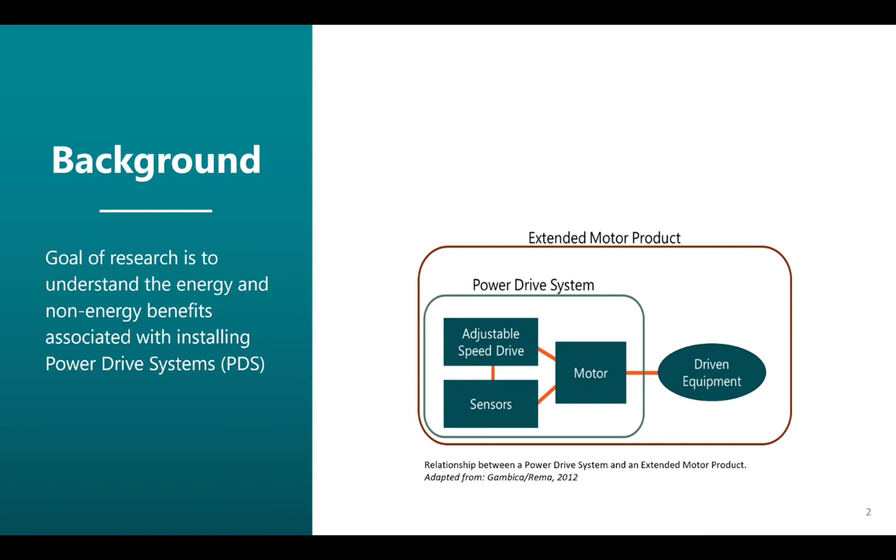While the use of adjustable speed drives and appropriate sensors and controls, or power drive systems, offers significant energy savings potential in commercial and industrial applications, they have traditionally been installed in variable load applications, such as heating and cooling systems responding to variable climate conditions. Many believe they only save energy or are cost effective in these types of applications. The goal of this research was to better understand the energy and non-energy benefits associated with power drive systems in both constant and variable load applications, and particularly understand if power drive systems were cost-effective in constant load applications.

Now I'm going to hand it over to my colleague Nate to talk about the specifics of the analysis.

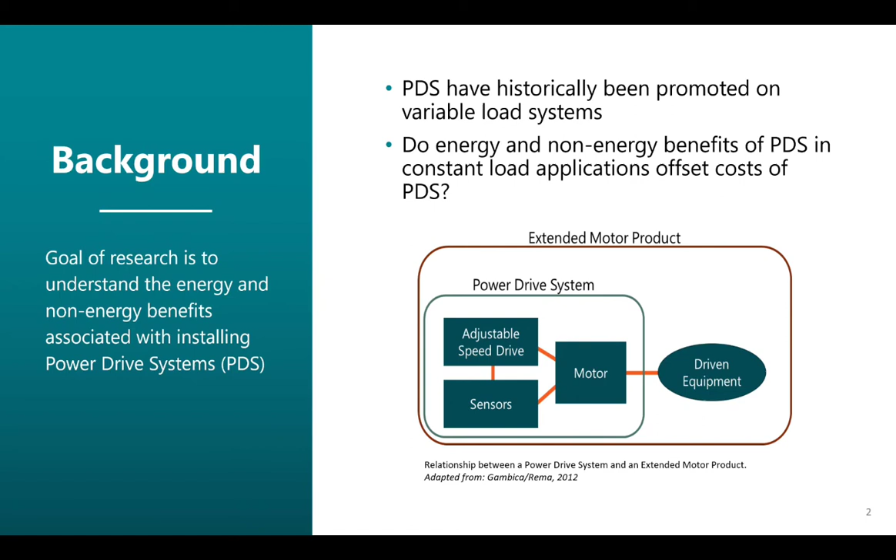While the universe of motor-driven loads is vast, we had to start somewhere. So to perform our analysis, we started with recent data collected by NEEA on pump performance in the Pacific Northwest. We used data on 132 pumps from that work, incorporating pumps that had sufficient characteristic and operational information to effectively characterize load profile and energy consumption in both constant and variable speed applications.

Using these data, we explored three main topics. One, the specific load profiles observed in different applications and how variable or invariable they were, to determine if there were any inherently constant or inherently variable load applications. Two, the energy savings associated with power drive systems across these applications and load profiles. Three, the observed application or penetration of power drive systems among these different applications.

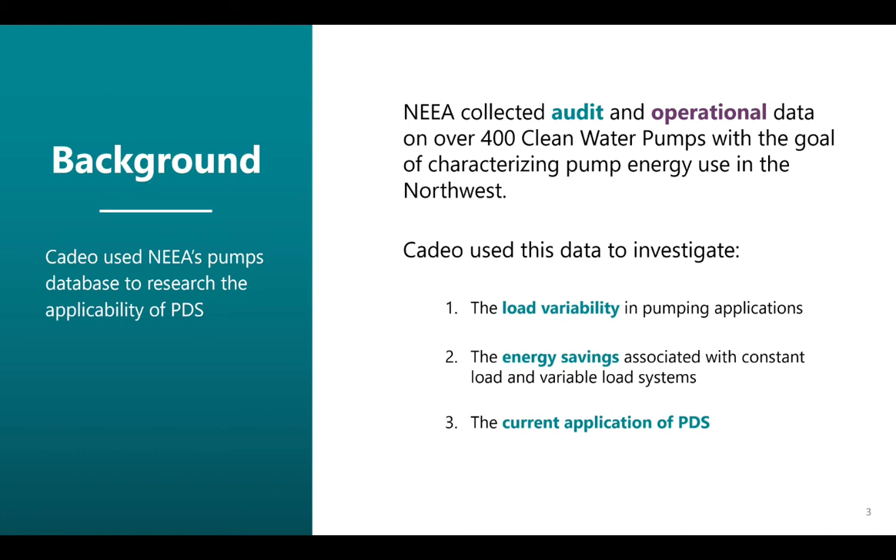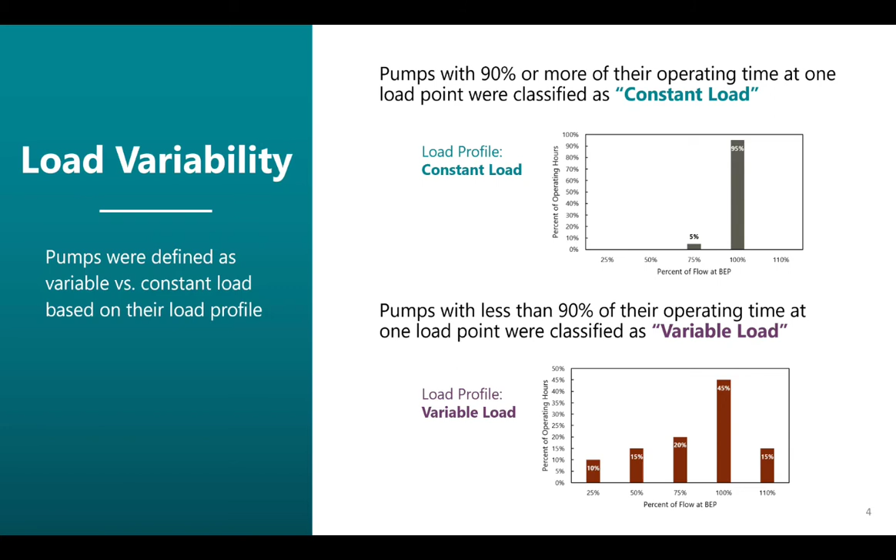While these data only include pumps, the general findings can be expanded to other similar motor-driven products like fans and compressors. To perform this analysis, we first investigated the load profiles observed in the data and categorized them into constant load and variable load systems, where constant load systems spent 90% or more of their time at one load point, and variable load systems demonstrated more variable operation. Note that these characterizations are purely related to the load the pump is serving and are independent of whether the system is equipped with a variable speed drive or not.

The first thing we observed was that there were no applications that were inherently constant load and demonstrated no variability. Some applications are more variable than others, but there are opportunities for savings from power drive systems in all applications.

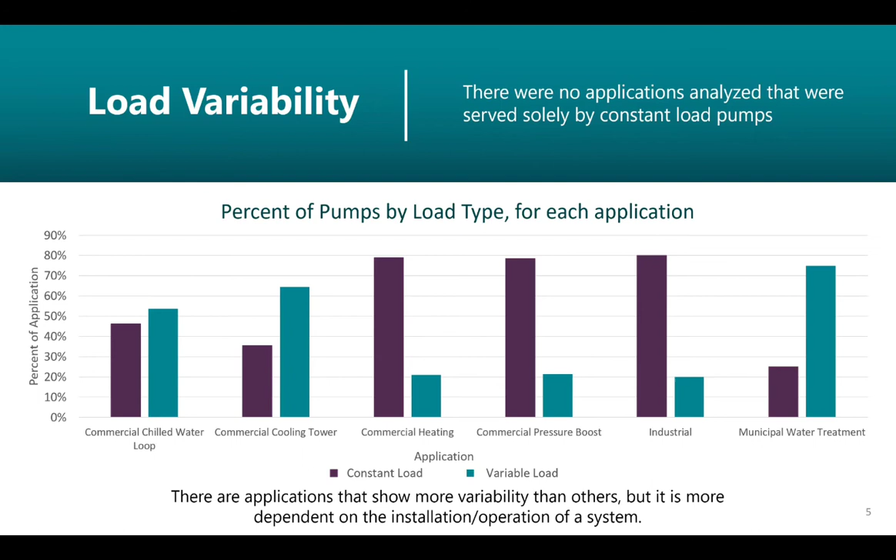Next, we looked at what type of applications and system drives are being installed on. That is, we analyzed how many pumps in our sample were equipped with a drive for both constant and variable load systems in each application. Categorizing the data into these four buckets, it was evident that drives are being installed on systems regardless of the system variability. In the data set we analyzed, 43% of the pumps equipped with power drive systems operated with constant loads. This indicated that while the energy savings may be lower for constant load pumps, the benefits of a power drive system are still large enough to justify installing in many cases.

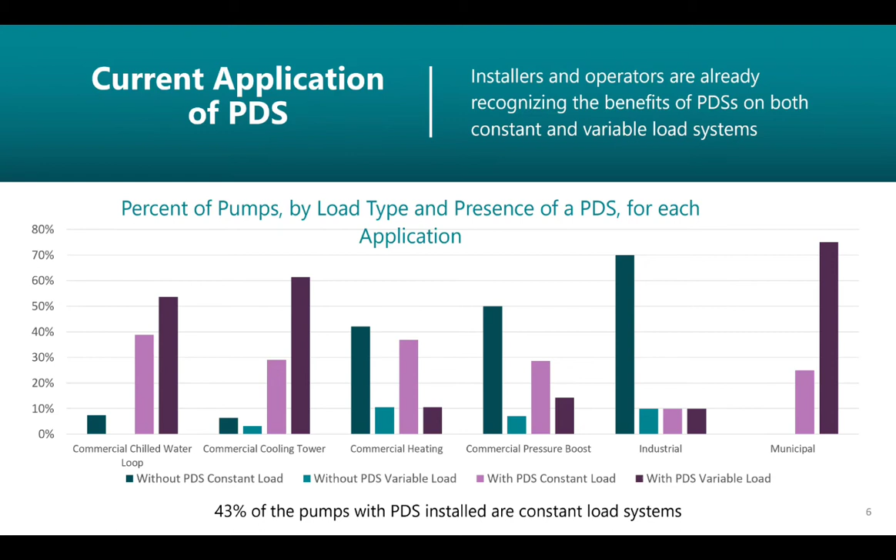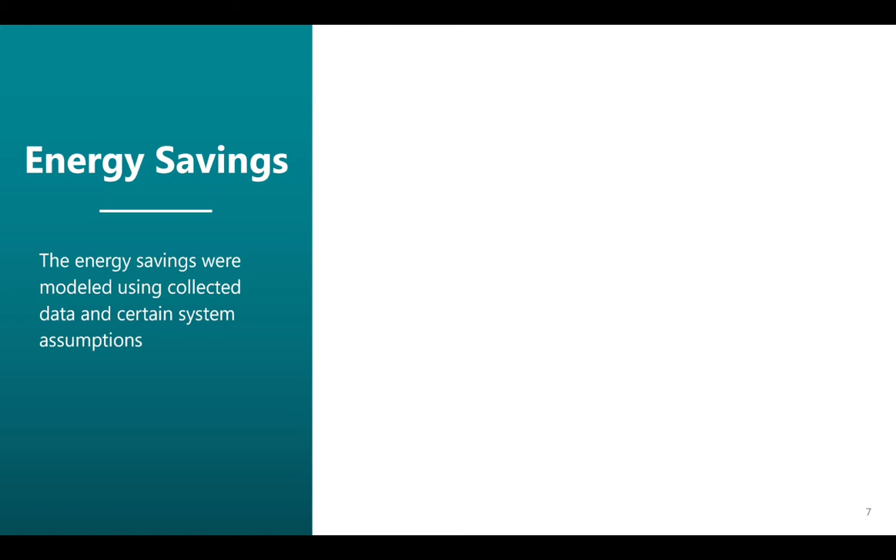Having considered each pump as serving either a constant or variable load, the second question we investigated focused on understanding the energy savings associated with installing power drive systems on pumps serving those different load types. To calculate energy savings, we modeled the operation of each pump as if it were controlled in two different ways: either by constant speed control, with the system throttled to meet the specific load point, or served by a power drive system, where the necessary load could be met by varying the speed of the pump and allowing the pump to operate along the system curve.

The pump data used for this analysis included information on the pump performance curve, which represents the relationship between flow, pressure, and power for a specific pump. Using this information, along with the pump's load profile, we calculated the annual energy consumption by multiplying the power draw at each load point by the number of operating hours spent at each load point. This represents the energy consumption of each pump when its load is met without speed control.

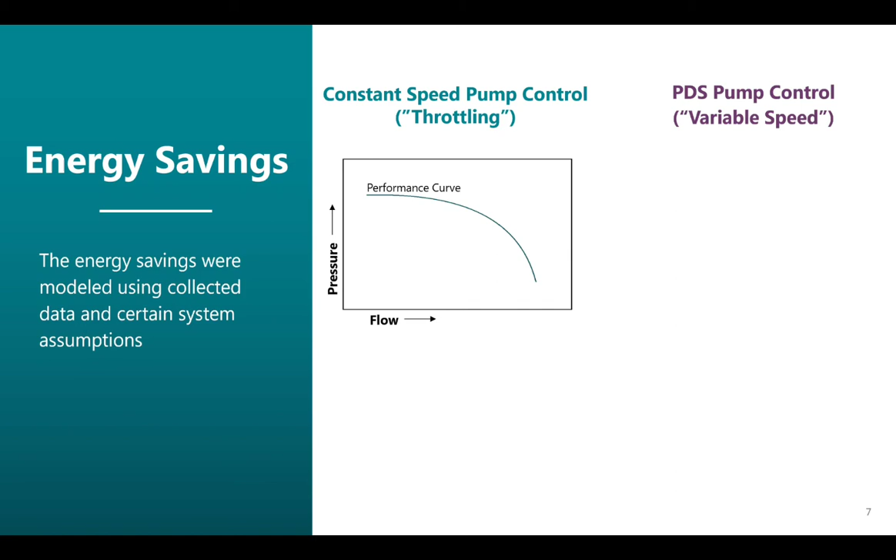Modeling the energy consumption of a pump with a power drive system was a bit trickier. When the speed of a pump changes, the pressure and flow don't follow the performance curve, but instead they track down the system curve, which is defined by a set of physical principles called the affinity laws. The system curve is dependent on two variables: static head and full speed operating point.

Static head is the amount of pressure a pump must overcome to initiate flow, and is usually proportional to the vertical distance between the inlet to the pump and the discharge of the system. This pressure can range from 0 feet of head in closed loop systems to really high values in systems that include a large vertical lift.

For this analysis, we assume the closed loop systems had 0 static head. Commercial cooling towers and pressure boost systems had a static head equivalent to 35% of head at the pump's best efficiency point, or BEP. And industrial and municipal pumps had static head equivalent to 22% of head at BEP. These static head values are averages observed through NEEA's research into pump operation.

Full speed operating point represents where the pump would naturally operate at full speed without any system throttling. That is the point where the performance curve and the system curve intersect. Because the available information differed from pump to pump in NEEA's dataset, there were a couple methods we used to determine the full speed operating point.

If a pump was equipped with a variable speed drive and data on pump speed was available, the flow at full speed was calculated using the affinity laws. If the pump was equipped with a variable speed drive, but speed data was not available, the maximum observed flow rate was established as flow at full speed. For constant speed pumps, we based the full speed operating point on BEP.

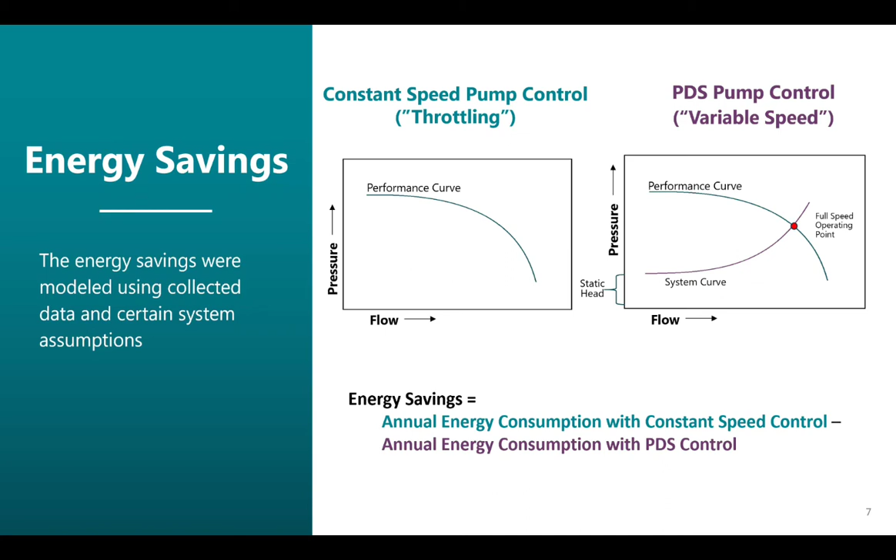The energy savings for installing a power drive system on any given pump is simply the difference between the constant speed energy consumption and variable speed energy consumption.

Thanks, Nate. Let's take a step back here and unpack how power drive systems can facilitate energy savings in both variable load and constant load applications.

For variable load applications, the power drive system allows the pump to more efficiently meet the load requirements, decreasing unnecessary system pressures and decreasing power draw. This is the energy savings mechanism most often thought of when power drive system installation is considered.

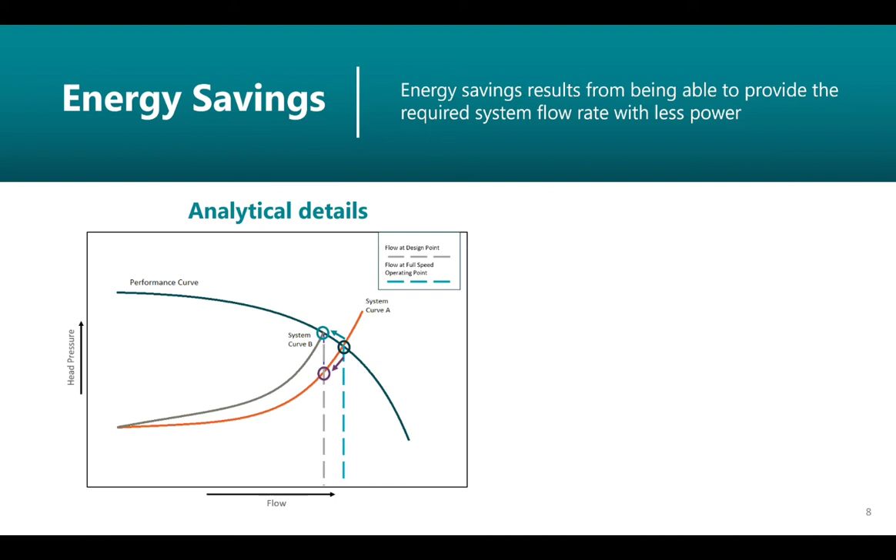The energy savings for constant load systems are a little more nuanced. As Nate reviewed, the system curve is defined by static head, which impacts how much the drive can turn down while still meeting the system requirements, as well as the full speed operating point, which represents where the pump, as installed, would operate with no artificial head in the system.

As the chart on the slide shows, the full speed operating point is often at a slightly higher flow rate than the intended design flow due to the tendency of design engineers to specify robust and conservative designs that will ensure system performance is provided, despite any uncertainties that might occur during construction or installation.

This almost always results in an oversized pump, but for completely logical and appropriate reasons, since it's much easier to adjust a pump that is slightly too large than address one that's too small. People don't notice if they have an oversized pump, but they certainly won't be happy if they have an undersized one.

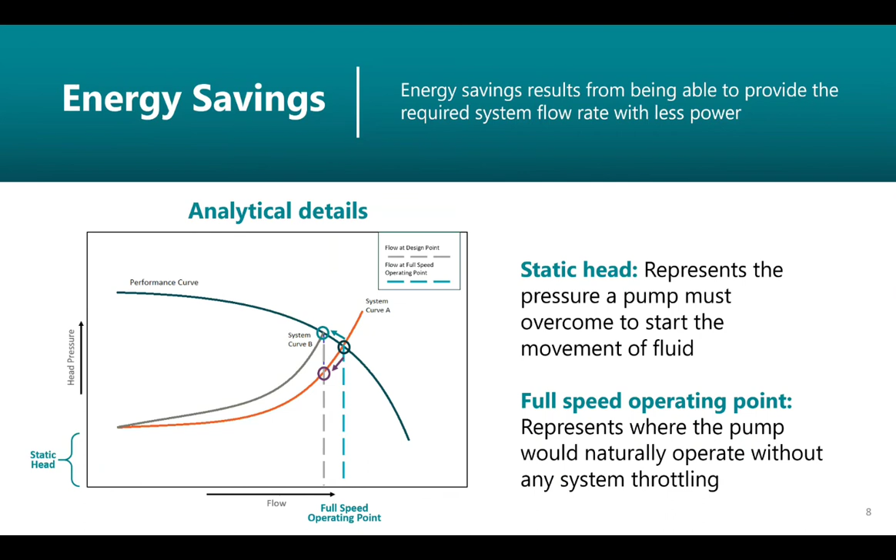With a constant speed pump, the design flow is achieved during system commissioning, typically by throttling the pump using a balancing valve. With power drive systems, however, the design flow can be achieved more efficiently by simply slowing the pump down. This makes power drive systems an excellent design choice because it can mitigate some of that design variability and ensure efficient and flexible operation across a range of flow rates and system conditions that might be found in the field. This also has the benefit of adding a bit of future-proofing to the system.

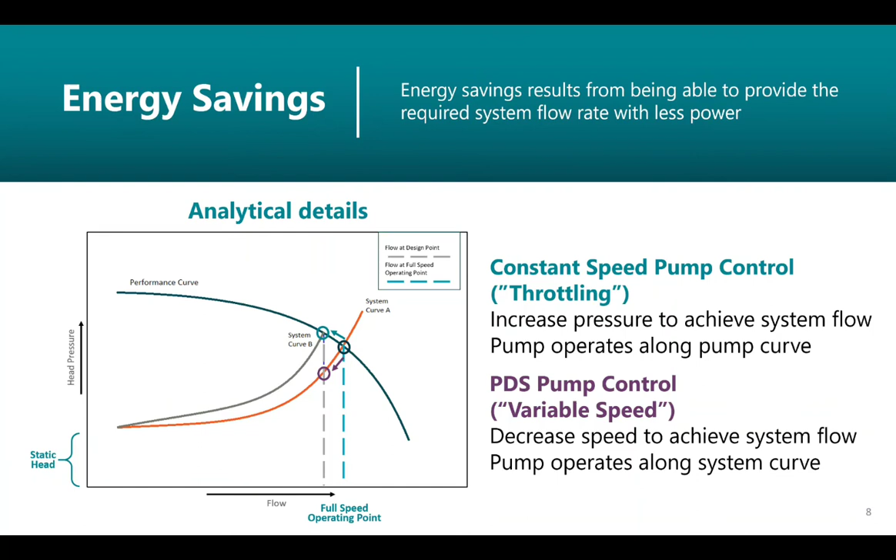As production requirements change over time, power drive systems can adjust so that energy use is optimized whether the system is needed at a higher or lower level than was originally specified in the design. Let's keep those two savings mechanisms in mind when we're looking at the energy savings from installing power drive systems.

From an application perspective, a power drive system creates energy savings for both variable and constant load systems in all applications except municipal water treatment, which saw large energy savings potential for variable load systems but no savings potential for constant load systems. This difference could be driven by two factors. The first is related to pump application, since pumps are a main piece of equipment in municipal water treatment plants. These facilities dedicate a lot of resources to ensuring efficient pump operation because it's so closely tied to the facility's purpose.

The second factor is related to the data used for this analysis. The sample size for constant load municipal pumps was small, and the smaller the sample size, the more impact an individual site has on the average. The municipal treatment savings values are probably impacted by a combination of both a small sample size and a tendency for municipal pumps to operate more efficiently.

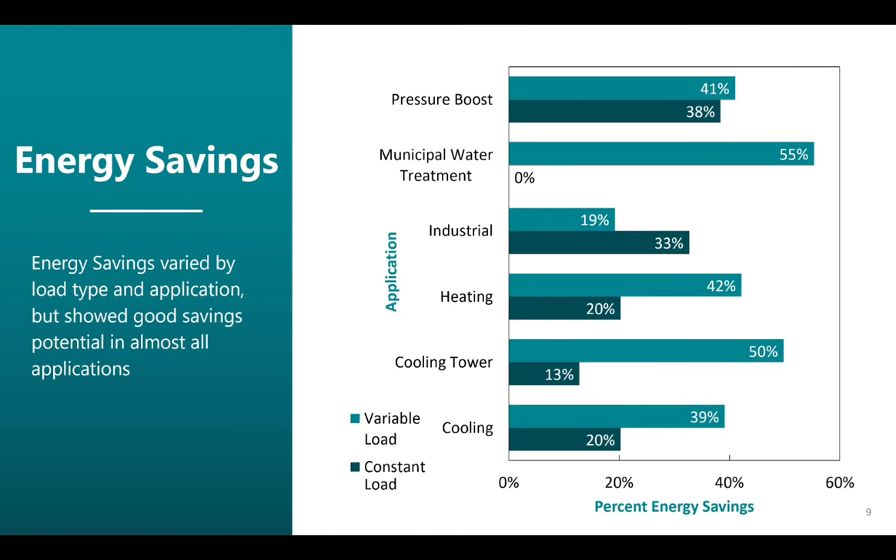From an aggregate perspective, our analysis found that, on average, variable load systems see higher savings, but there is significant savings potential in both constant and variable load cases, as you can see on the slide. We also found those cost savings to be cost-effective, with payback periods of less than a year based on current drive costs and an assumed electricity price of 12 cents per kilowatt hour, the national average.

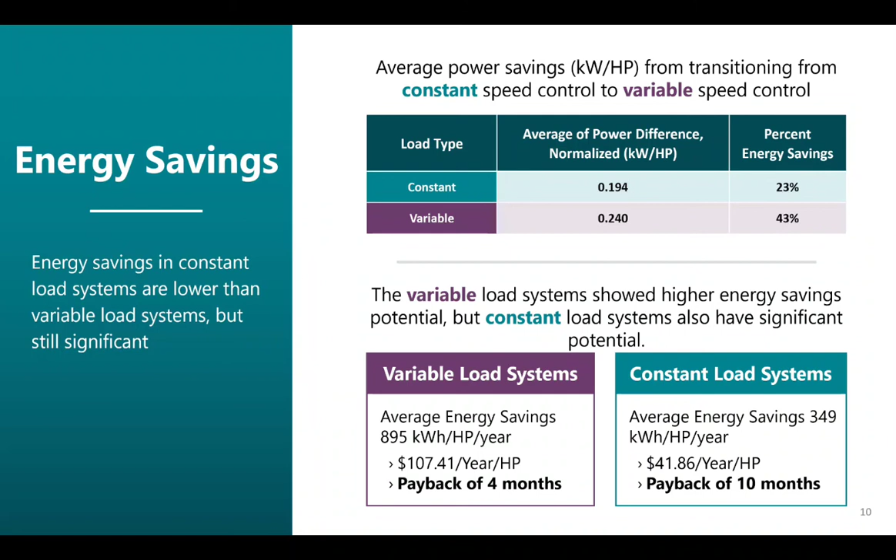These energy savings are very compelling, but the analysis depends on static head and full speed operating point assumptions, and differences in those two variables have the potential to impact the energy savings we calculated. We used a sensitivity analysis to investigate the impact of variations in static head and full speed operating point on our findings. Our analysis showed that, for the pumps in this study, static head had a larger impact on energy savings than full speed operating point, but neither variable changed the overall conclusions.

We found static head to be more impactful because the pumps in the study spend a lot of time operating at low flow rates, meaning fluctuations in static head have a greater impact on the relationship between flow and pressure, increasing the variability in energy savings. While the energy savings did vary in the sensitivity analysis, the high-level findings show that constant load systems represent a viable option for power drive systems.

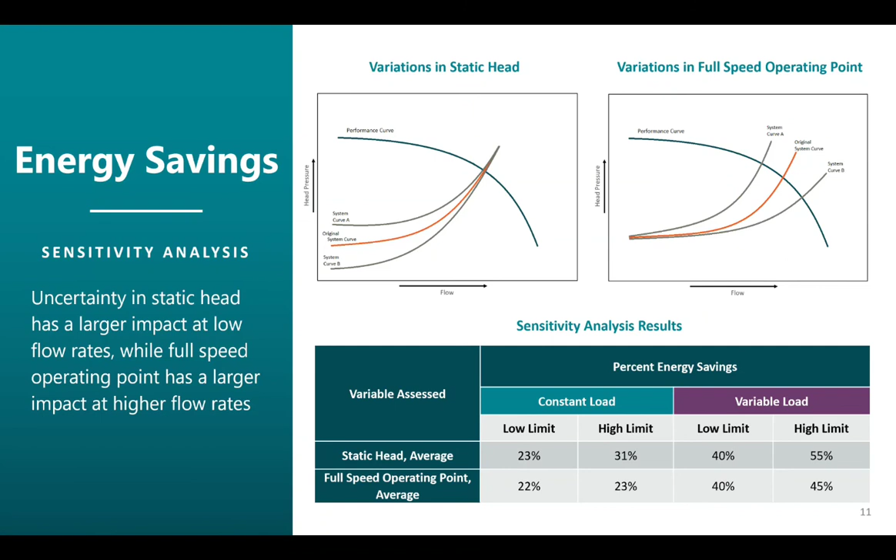Really good point, Nate. And in addition to the energy savings, power drive systems can also provide a number of additional benefits, including decreased maintenance from soft starting and reduced wear and tear on equipment, as well as process improvements such as improved controllability and visibility into the system, reliability, reduced maintenance, future-proofing of the system, and IoT connectivity control. These benefits allow for more flexible system operation, increased production, and the potential for more advanced connectivity, especially demand response, which is very popular these days.

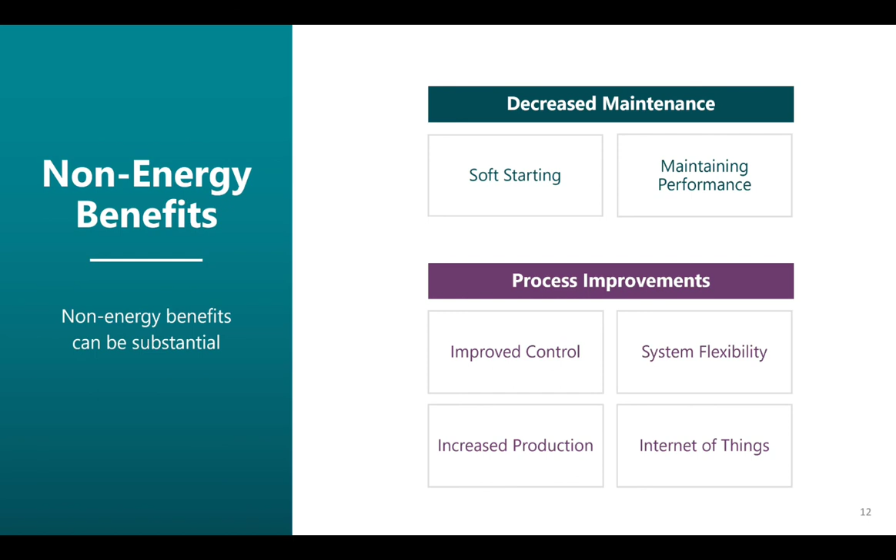These benefits are especially important in industrial settings and can sometimes outweigh the energy savings of drives. While these findings demonstrate real and compelling reasons to consider power drive systems across a range of applications, more work is needed to further evaluate the right-sizing benefits of power drive systems by working with commissioning agents and test and balance contractors to better quantify the level of throttling and current control practices occurring in the field.

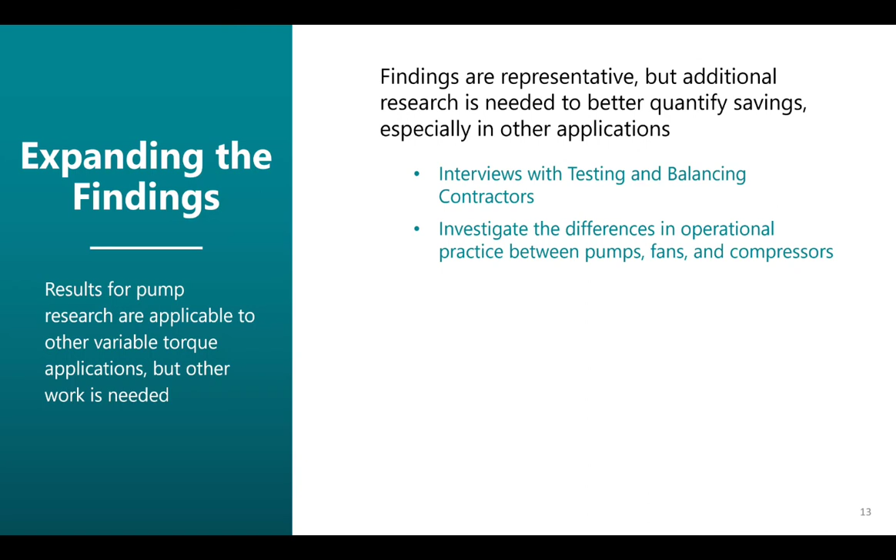We also think these pump-specific results are representative of the likelihood of savings from other variable torque loads like fans and some compressors. However, we'd like to do independent analysis of these different equipment types to better account for any operational differences. It will also be important to consider the benefits of power drive systems for non-variable torque loads, where non-energy benefits may play a larger role in determining cost effectiveness.

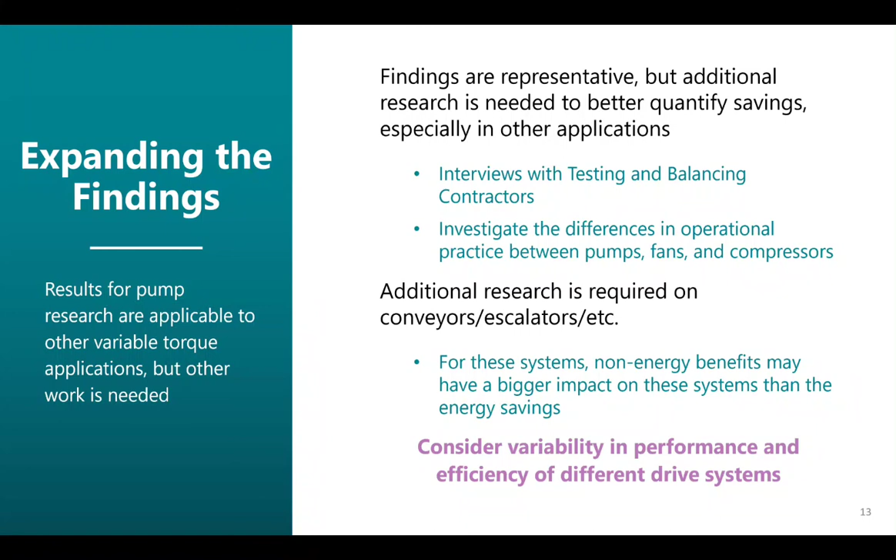Finally, as we move forward, it will be important to consider the differences in efficiency and performance of different drive systems, and to ensure that power drive systems are all providing the same level of performance that we expect. We're looking forward to continuing to develop and share these results.